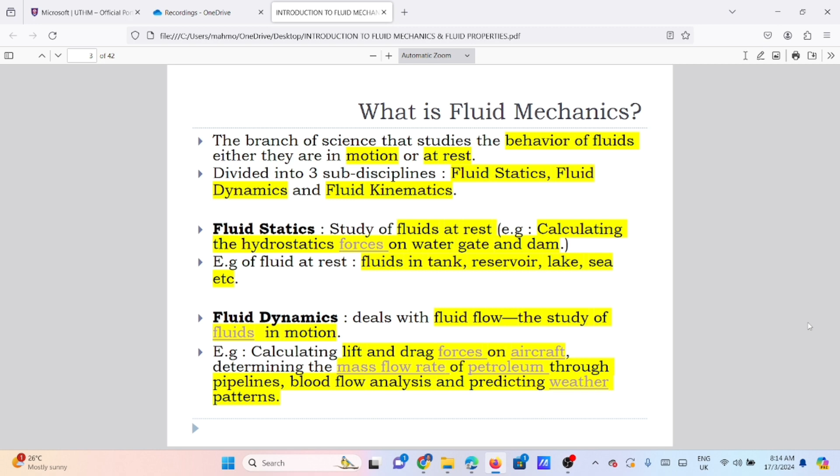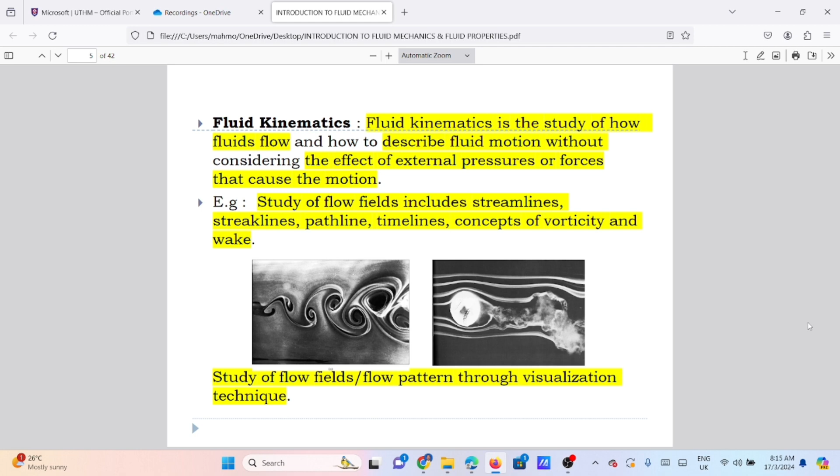The third one is fluid kinematics. Fluid kinematics is the study of how fluid flows and how to describe fluid motion without considering the effect of external pressure or force that causes the motion. Its study of fluid flow includes streamlines, streak lines, path lines, timelines, the concept of vorticity, and wakes. This is a picture about the flow field study and flow pattern throughout visualization technique.

The application of fluid mechanics is in many engineering systems, especially mechanical engineering. This includes the design and analysis of pumps, turbines, aircraft, boats, submarines, rockets, jet engines, wind turbines, steam power plants, refrigeration systems, hydraulic systems, engine and radiator systems, lubrication, and the transportation of fluids like water, crude oil, and natural gas, etc.

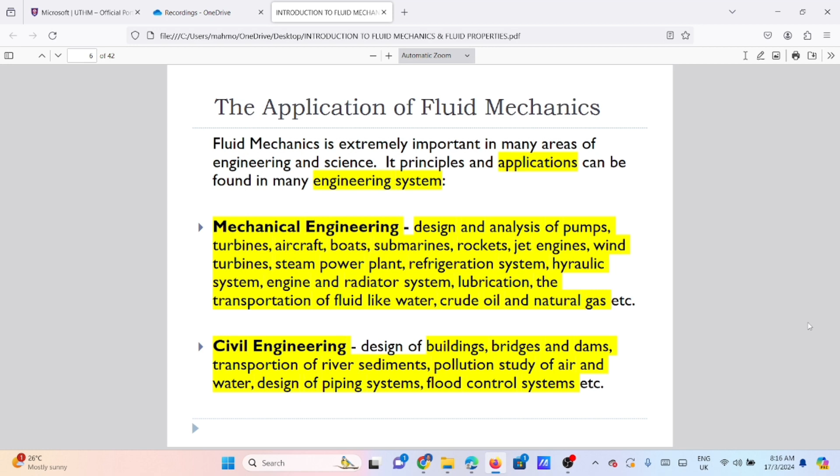Secondly is civil engineering, which includes the design of buildings, bridges, dams, transportation of river sediments, pollution, study of air and water, design of piping systems, flood control systems, etc. This is the picture about November 1940, when the original Tacoma Narrows Bridge roadway twisted and vibrated violently leading to its collapse. You can see this in the author's material, and there's an uploaded video about the Tacoma Bridge.

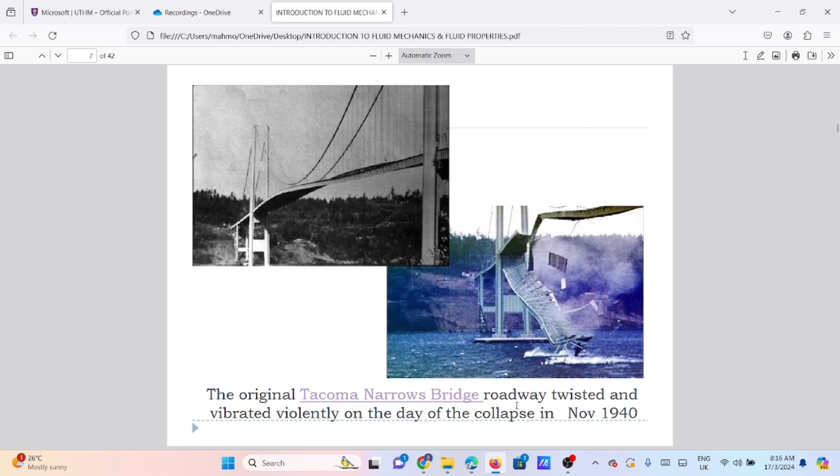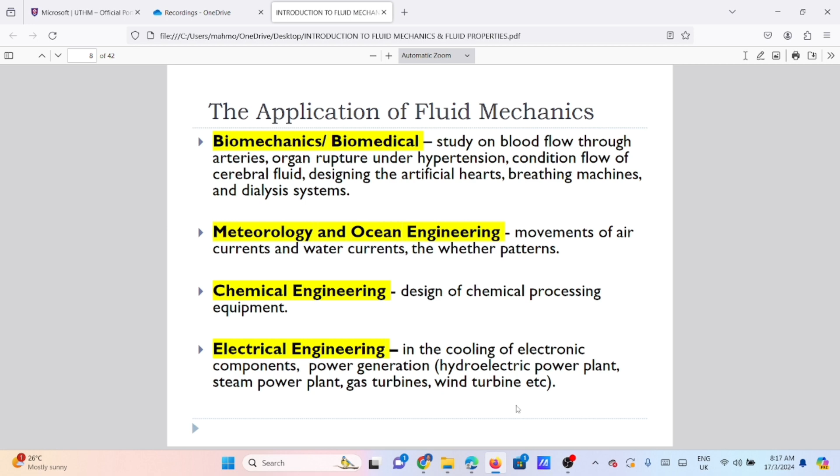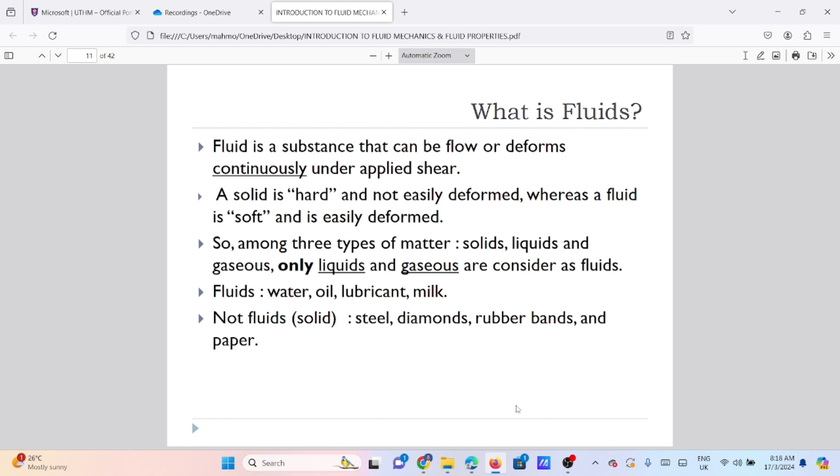So what are fluids? A fluid is a substance that can flow or deform continuously under applied shear. A solid is hard and not easily deformed, whereas a fluid is soft and easily deformed. Among the three types of matter—solids, liquids, and gases—only liquids and gases are considered fluids. Examples of fluids are water, oil, lubricant, and milk. Examples of non-fluids, which are solids, include steel, diamonds, rubber bands, and paper. This is a comparison between liquids and gases based on their molecule spacing. Liquids normally have higher densities than gases.

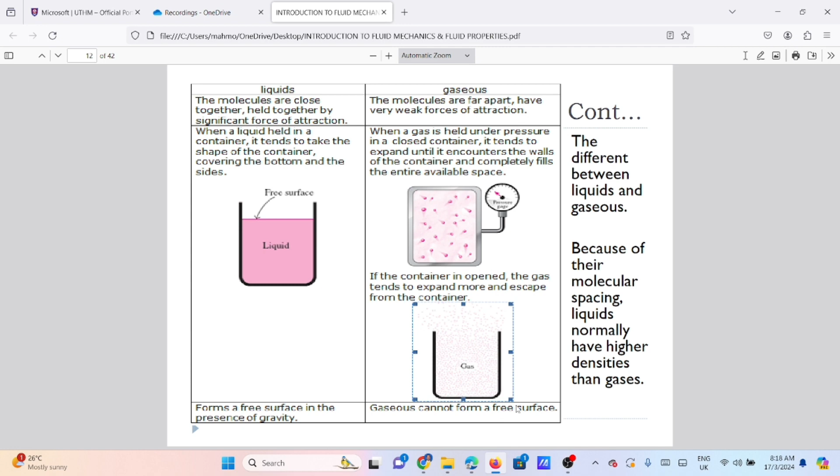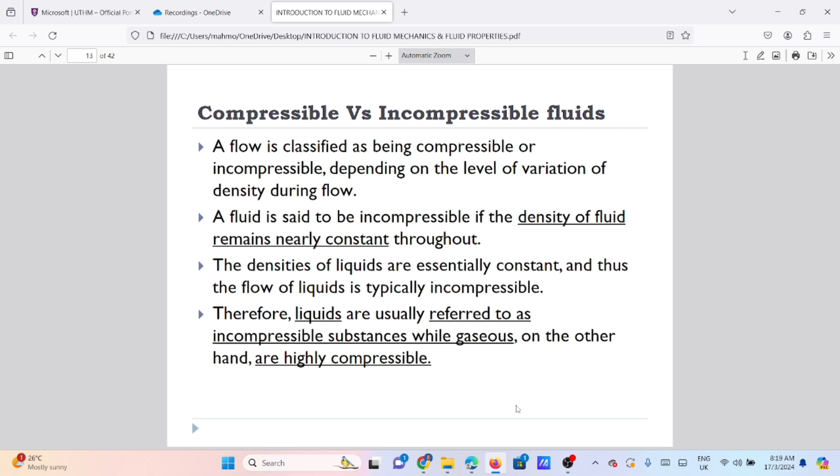What is the difference between compressible and incompressible fluid? A flow is classified as compressible or incompressible depending on the variation of density during flow. A fluid is incompressible if its density remains constant throughout. The density of liquids is essentially constant, so the flow of liquid is incompressible. Therefore, liquids are usually referred to as incompressible substances, while gases are highly compressible.

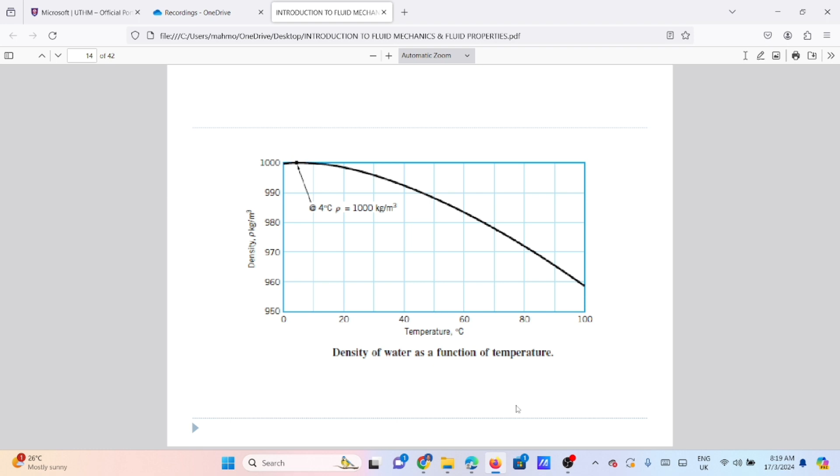4 degrees Celsius. So what is the difference between Newtonian and non-Newtonian fluid? Newtonian fluid is any fluid that behaves in accordance with Newton's law of viscosity. For example, water, oil, gasoline, benzene, kerosene, alcohol, and glycerin are classified as Newtonian fluids.

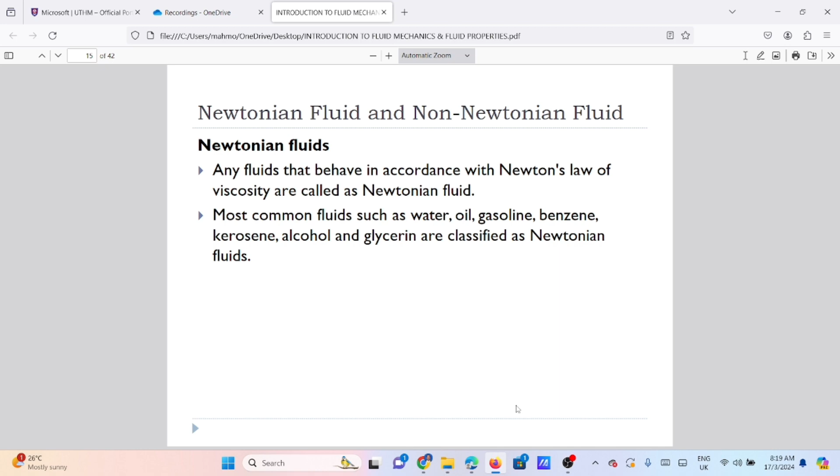Non-Newtonian fluid is a fluid in which shearing stress is not linearly related to the rate of shearing strain, or in other words, fluids that do not obey Newton's law of viscosity are designated as non-Newtonian fluid. Generally, non-Newtonian fluids are complex mixture fluids, such as paste, gel, polymer solution, and so on. Although there are a variety of types of non-Newtonian fluids, the simplest and most common are fluids with time-independent behavior, as shown in the following figure.

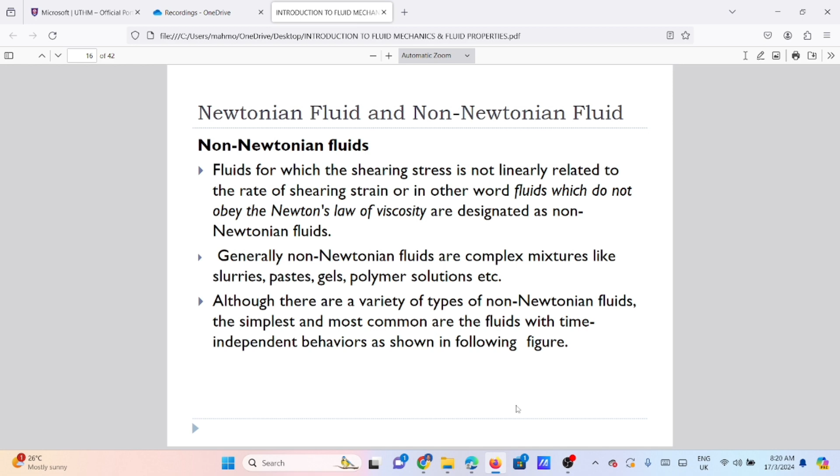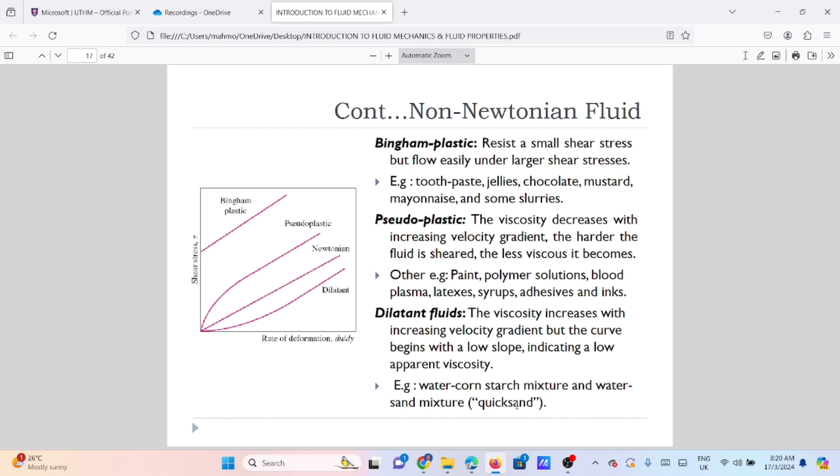So this is a non-Newtonian fluid diagram. You can see the types: Bingham plastic, pseudoplastic, Newtonian, and also dilatant.

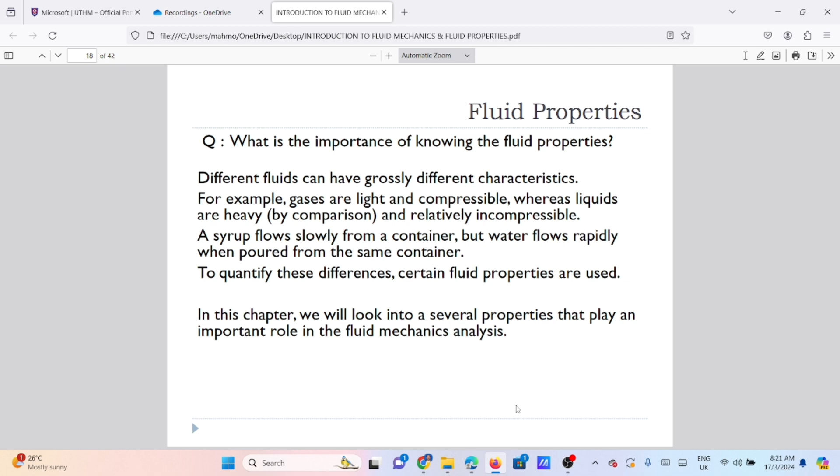So what is the importance of knowing fluid properties? The important point is that different fluids can have grossly different characteristics. For example, gases are light and compressible, whereas liquids are heavy by comparison and relatively incompressible. A syrup flows slowly from a container, but water flows rapidly when poured from the same container. To quantify these differences, certain fluid properties are used. So in this chapter, we look into several properties that play an important role in fluid mechanics analysis.

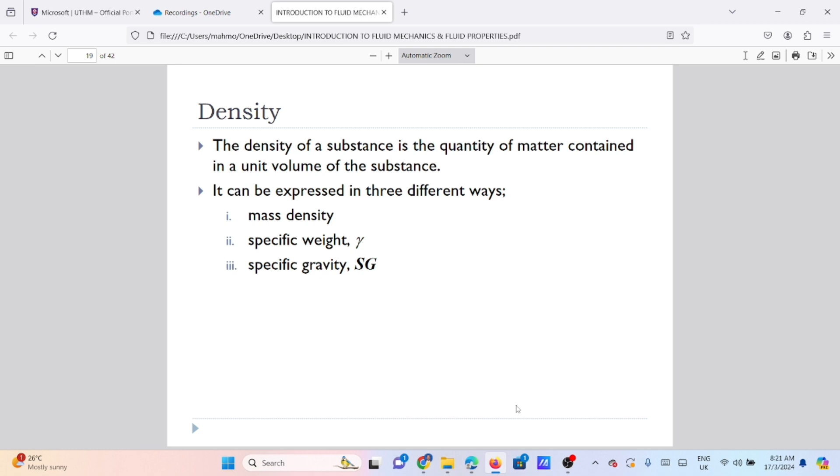So we study density. Density is a type of parameter. It's very important for quantifying the mass contents in a unit volume of a substance. It can be expressed in three different ways: one is mass density, number two is specific weight gamma, and lastly specific gravity SG.

So mass density, also referred to as only density, describes the heaviness of fluids, designated by the Greek symbol rho. Rho is equal to mass divided by volume. So the SI unit for density is kilogram per meter cube.

So the value of density for some common liquids, for example at atmospheric pressure 1.013 bar and temperature at 4 degrees Celsius, these are constant values: for water H2O, 1000 kilogram per meter cube; for air, 1.23 kilogram per meter cube; and lastly mercury, 13546 kilogram per meter cube.

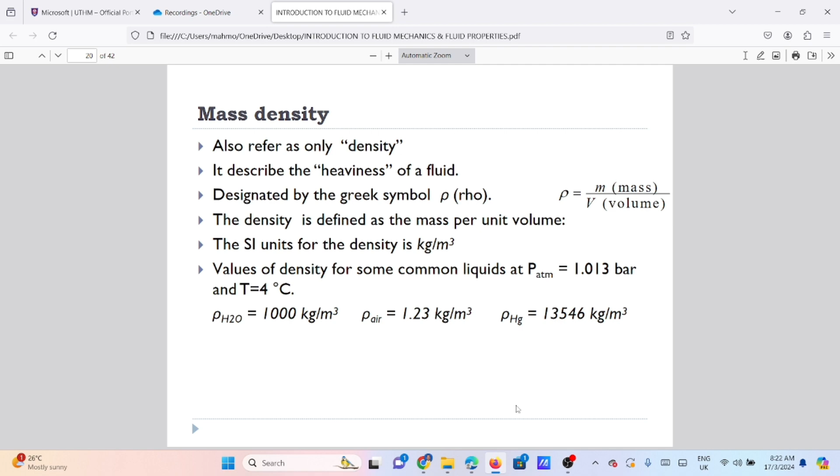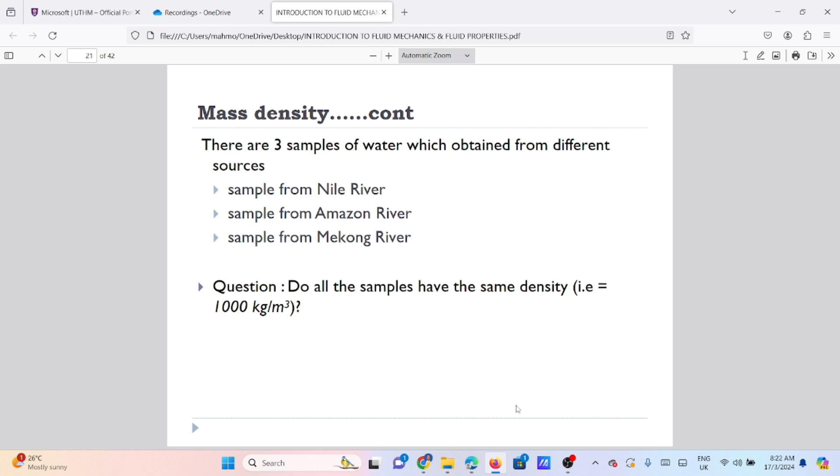So how about specific weight? Designated by the Greek symbol gamma, specific weight is defined as the weight of a substance per unit volume, and can be expressed as gamma equals rho times g. Rho is the density, g is the gravitational acceleration, 9.81 meter per second square, which is constant. The SI unit for specific weight is Newton per meter cube.

So the common value of gamma at 4 degrees Celsius: especially for water, 1000 times 9.81, so the answer is 9810 Newton per meter cube. And gamma of air is 1.23 times 9.81, equal to 12.07 Newton per meter cube.

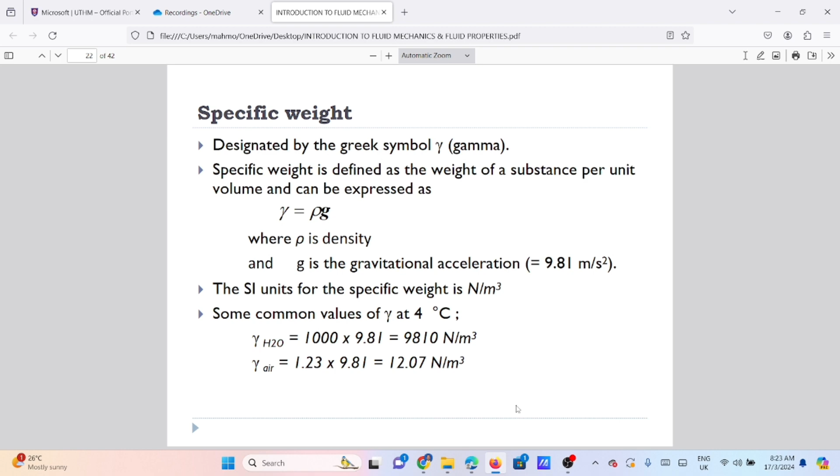So about specific gravity, also known as relative density.

This has the same meaning. It's designated by the symbol SG, and specific gravity is defined as the ratio of the density of the substance or fluid to the density of water. So the formula is SG fluid equals fluid density divided by water density.

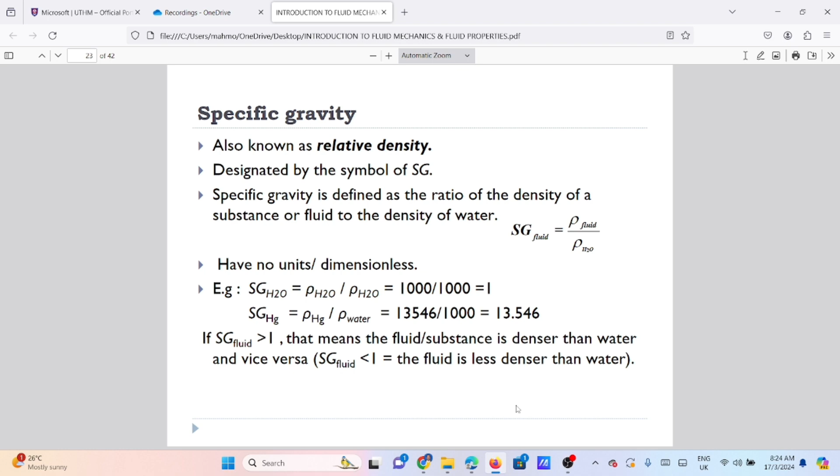There is no unit, it's dimensionless. For example, if we want to calculate for water, SG H2O is H2O density divided by H2O density, which equals 1. For mercury, it's mercury density divided by water density, so the answer is 13.546. So if specific gravity is more than 1, that means the fluid or substance is denser than water, while if specific gravity is less than 1, the fluid is less dense than water.

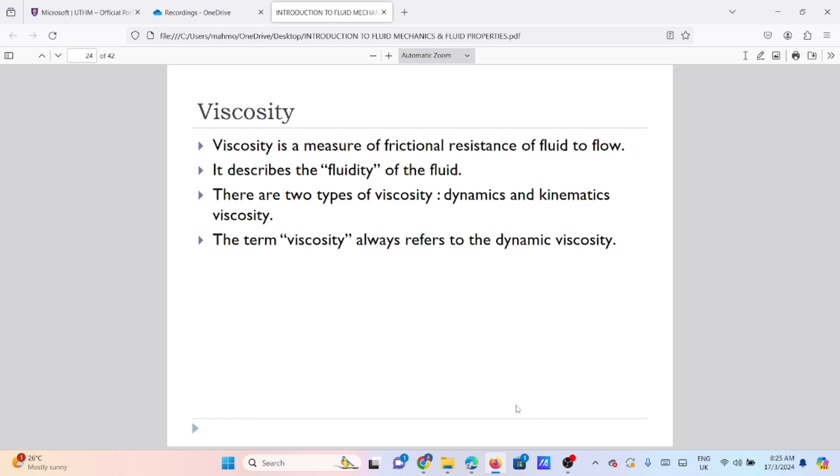Another important parameter is viscosity. Viscosity is familiar in describing fluid mechanics because viscosity is the measure of frictional resistance of the fluid to a flow. It describes the fluidity of the fluid, and there are two types of viscosity: dynamic and kinematic viscosity. The term viscosity always refers to dynamic viscosity.

The formula is here. Dynamic viscosity's symbol is the Greek letter mu. Mu equals tau divided by du over dy. So mu is the viscosity of the fluid, tau is the shear stress, and du over dy is the shear rate of strain or velocity gradient. The SI unit for dynamic viscosity is Newton-second per meter squared, or kilogram per meter-second, or in poise, where 1 poise equals 0.1 Newton-second per meter squared.

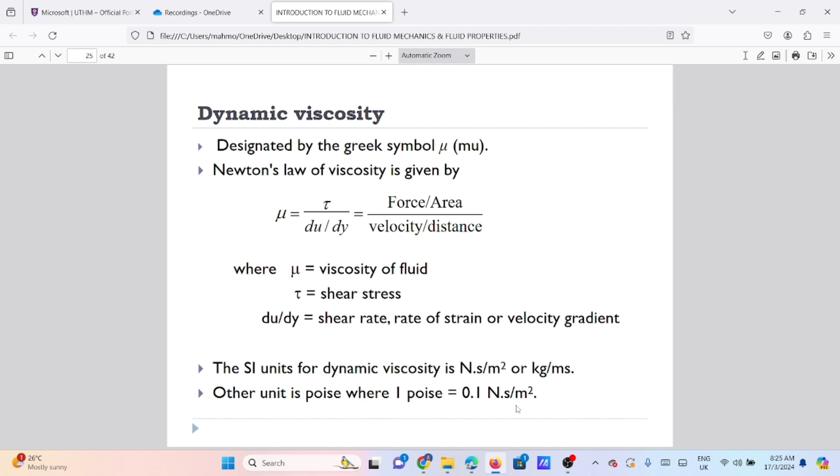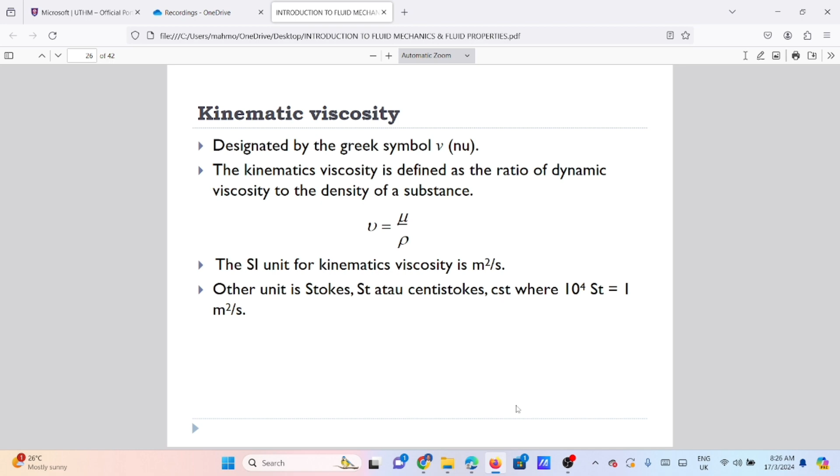Kinematic viscosity is designated by the Greek symbol nu. Kinematic viscosity is defined as the ratio of dynamic viscosity to the density of the substance. So nu equals mu divided by rho. The unit will be meters squared per second. Another unit is Stokes (St) or centistokes, where 10^4 Stokes equals 1 meter squared per second.

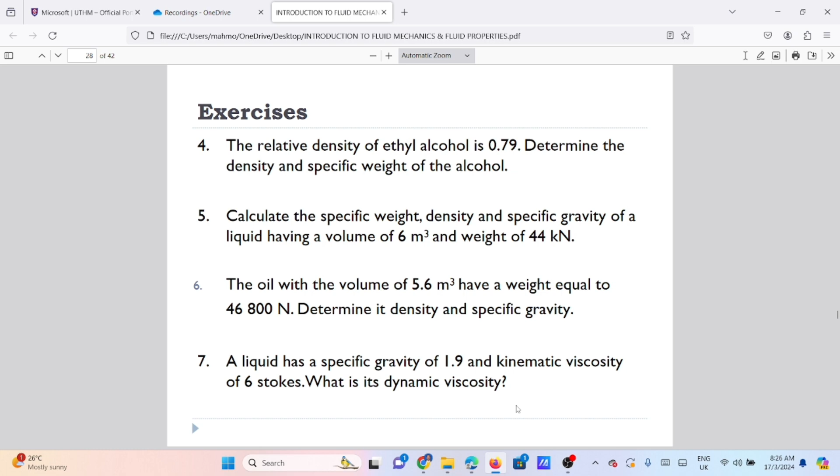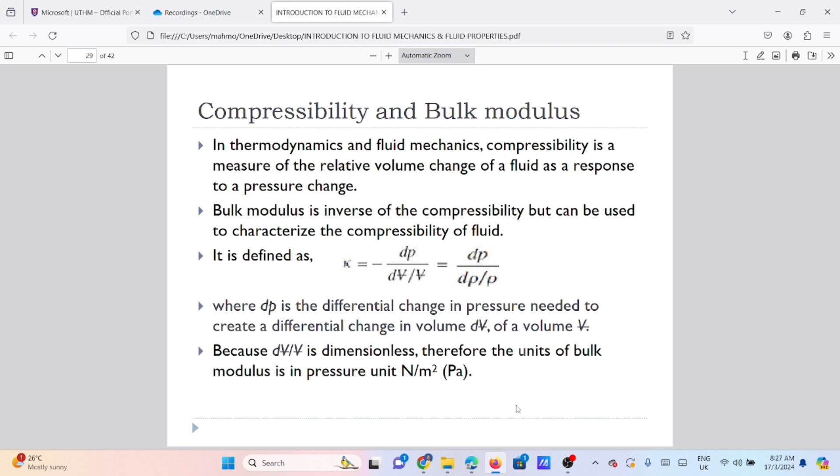It is defined by the symbol K, which equals negative dP divided by dV over V. Where dP is the differential change in pressure needed to create the differential change in volume, dV over V, which is dimensionless. Therefore, the unit of bulk modulus is still a pressure unit, Newton per meter squared or Pascal.

Bulk modulus is another important parameter. A large value of bulk modulus indicates that the fluid is relatively incompressible, meaning it takes a large pressure change to create a small change in volume. For example, at atmospheric pressure and a temperature of 288 Kelvin, we require a pressure of 21.5 megapascals to compress a unit volume of water by 1%.

This is representative of the compressibility of liquid. Since such large pressures are required to effect a change in volume, we conclude that liquids can be considered incompressible for most practical engineering applications.

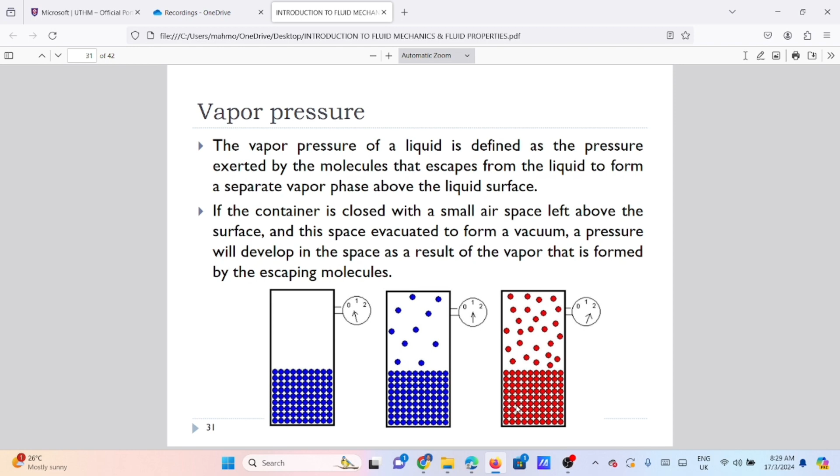So this is the vapor pressure. The vapor pressure of a liquid is defined as the pressure exerted by the molecules that escape from the liquid to form a separate vapor phase above the liquid surface. If a container is closed with a small air space left above the surface, and this space is evacuated to form a vacuum, pressure will develop in the space as a result of the vapor formed by the escaping molecules.

Vapor pressure, when an equilibrium condition is reached so that the number of molecules leaving the surface is equal to the number entering, the vapor is said to be saturated, and the vapor pressure that the vapor exerts on the liquid surface system is the vapor pressure.

The vapor pressure is influenced by the temperature and the nature of liquids. Some liquids consist of molecules that have a very weak attractive force between them, so these liquids evaporate easily. They are volatile, thus have higher vapor pressure.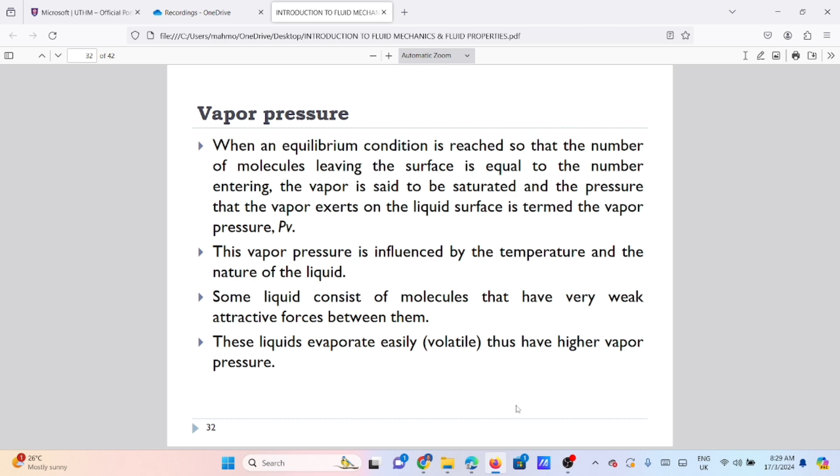Another parameter we call surface tension, sigma S. Surface tension can be defined as the intensity of intermolecular attraction, or attraction force per unit length along the free surface of the fluid. The effect is caused by unbalanced cohesive force at the fluid surface, which produces a downward resultant force that can physically be seen as a skin or membrane.

Surface tension is a fluid property, and it depends on the temperature and also on the types of solid surface interface. For example, a drop of water on a glass surface will have a different coefficient from a similar amount of water on a wood surface. The unit for surface tension is Newton per meter. The value of surface tension decreases as the temperature increases.

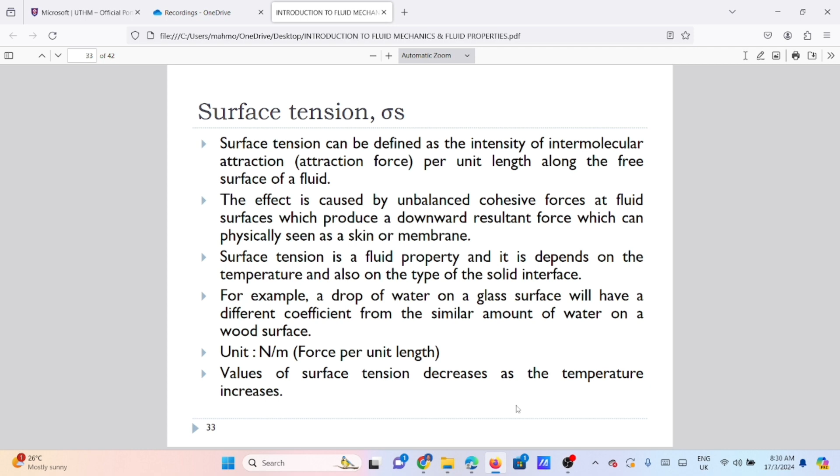Surface tension sigma is as follows: the formula is given F divided by 2B.

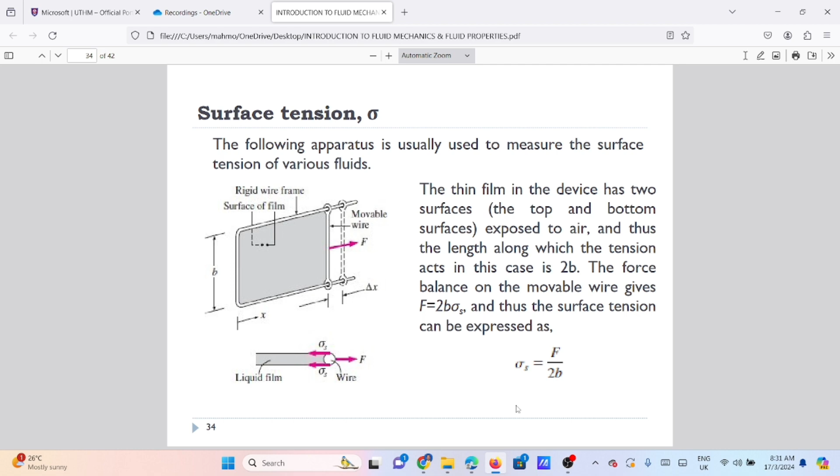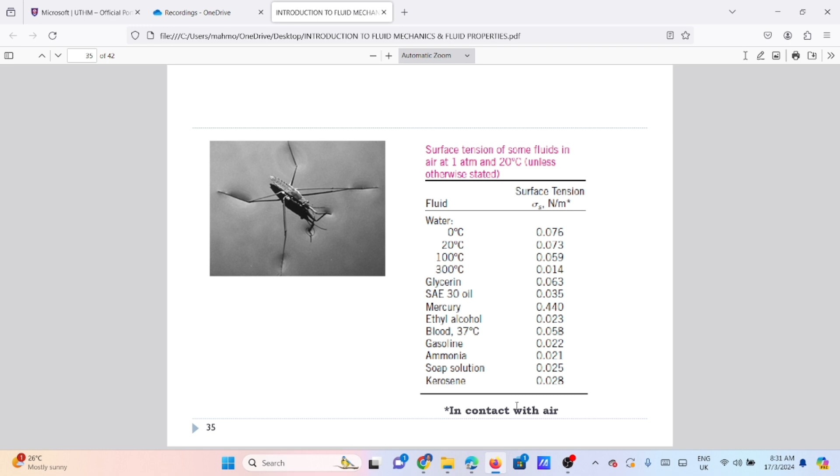This figure shows the difference between fluid and surface tension. You can see the mercury is very high compared to the water, 0.014, at 300 degrees Celsius, in contact with air. This is an example of surface tension.

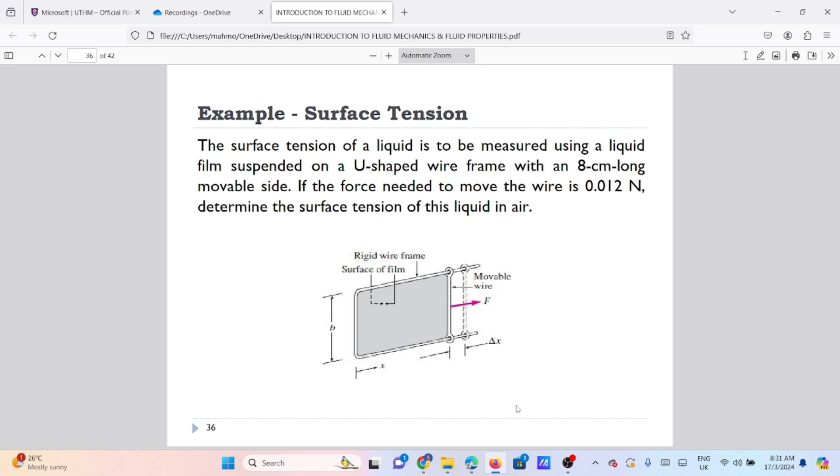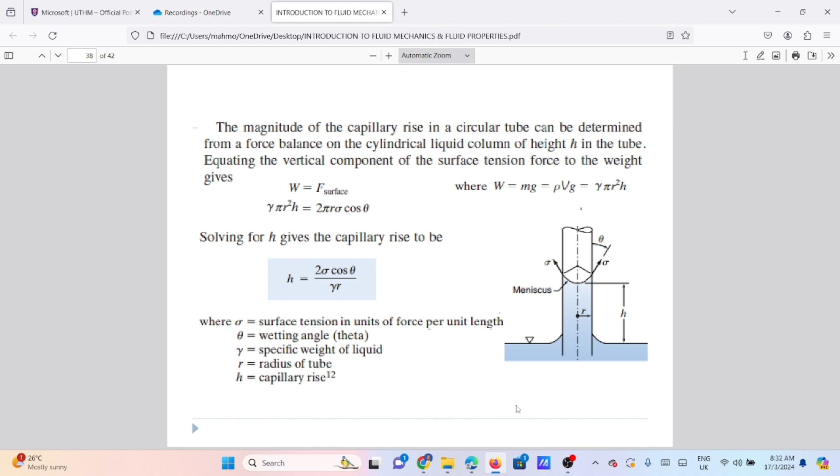H is equal to 2 sigma cos theta divided by gamma R. Sigma is the surface tension in units of force per unit length. Theta is the wetting angle. Gamma is the specific weight of the liquid, and R is the radius of the tube. H is the capillary rise.

This is a sample problem of the capillary rise of water in a tube. You can see how to use the formula based on the question given.

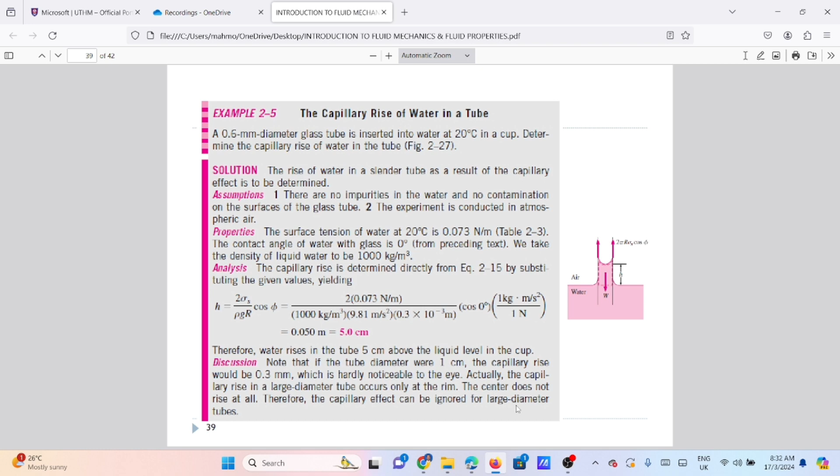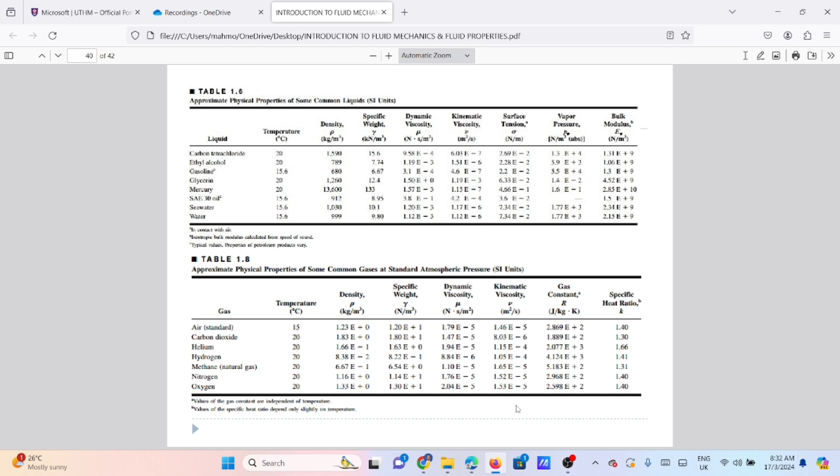This is table 1.6 and 1.8, with constant values for different types of liquid and gas.

The last sample of the slide is dimension and unit. Dimension is the measure of the physical quantity, for example, length, time, and mass. The unit is the assignment of a number to the dimension, for example, millimeter, meter, kilogram, gram.

There are 7 primary dimensions in this topic. Number one is mass, symbol M, unit kilogram. Length L, meter. Time T, second. Temperature, capital T, in Kelvin. Current I, ampere. Amount of light, candela. Amount of matter, mole.

In fluid mechanics, we just consider three symbols: M, L, and T. All non-primary dimensions can be formed by a combination of primary dimensions. For example, velocity is length divided by time, L over T, and force is mass times length per time squared, ML over T squared.

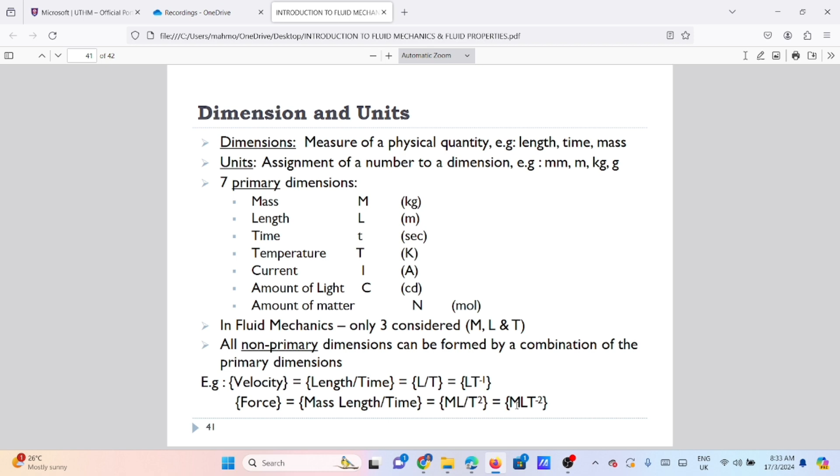Lastly, we call it dimensional homogeneity. What is dimensional homogeneity? An equation can be said to be dimensionally homogeneous if the dimension of the left side of the equation is the same as those on the right side, or all additive separate terms must have the same dimension.

For example, the equation of velocity V of a uniformly accelerated solid body is V equals V0 plus AT, where V0 is the initial velocity, A is the acceleration, and T is the time interval. The dimension of the equation is LT to the power minus 1 equals LT minus 1 plus LT minus 1. So all terms give the same dimension, thus the equation can be considered dimensionally homogeneous.